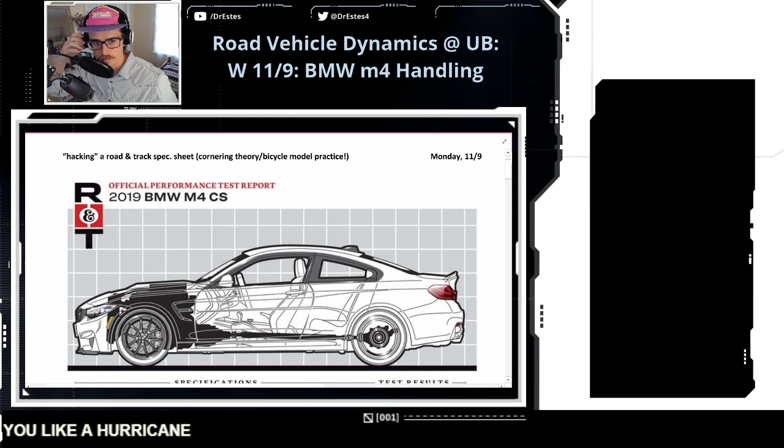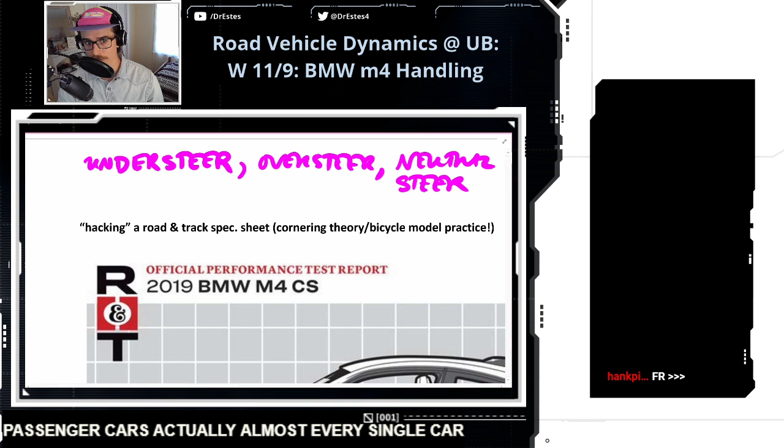Everybody, we're going to do a case study today. So we started talking about the understeer gradient and how there's different classifications of cars based on the understeer gradient. I'll just make a little note up here. A vehicle can be understeer, oversteer, or neutral steer. And passenger cars, actually almost every single car, even a high performance car, is going to be at least somewhat understeer.

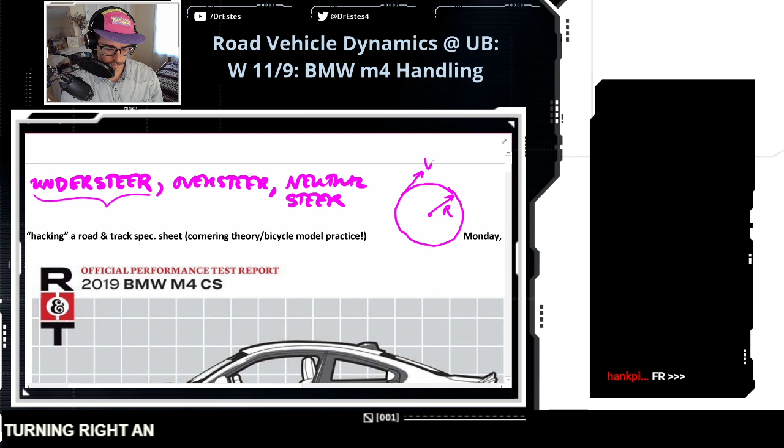We came up with a definition of the understeer gradient. If you had to say what does this mean in the simplest terms? Let's make a little picture. Let's say you're cornering a circular path, so it's got a constant radius. In vehicle dynamics, the technical name for this path is a skid pad. We use it for all sorts of handling testing for vehicles. But let's say you're turning right and your velocity is tangent to this circle. If you're in an understeer car and you keep going around this circle but slowly increase your speed, you're going to notice that you have to increase your steering angle as well. So you're going to have to keep turning harder and harder to the right to stay on this radius.

For an oversteer car, it's the opposite. As you increase your speed turning right, you're going to have to actually start decreasing your steering. And it can even get so extreme that you're counter steering eventually, which is what you see in drifting, right? Somebody might be taking a right turn, but their wheels are pointed to the left. The special thing about a neutral steer car is you can ride on this radius at any speed and your steer angle is not going to change. It's just like your steering wheel is fixed. And you can keep increasing speed and you're going to have to make minimal steering adjustments.

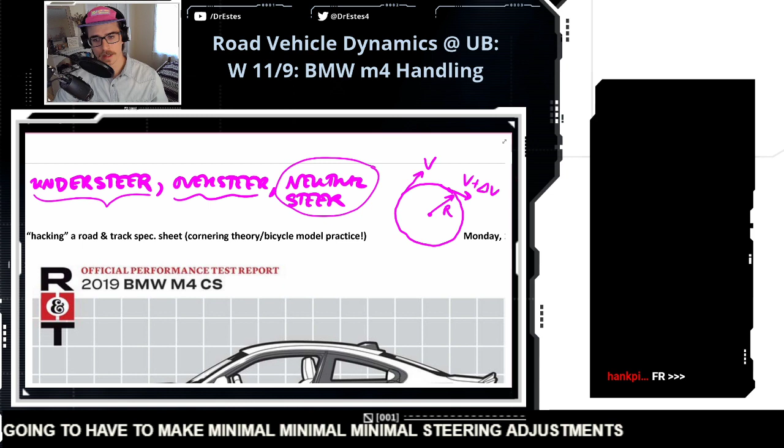So that's just a basic idea of what it means to be understeer or oversteer, but these have other implications on a vehicle's handling, and I want to unpack these this week. But so would FF be considered an understeer setup and FR be oversteer and MR neutral? I'm really embarrassed to say I don't know what that means. You're gonna have to tell me what FF, FR, and MR means.

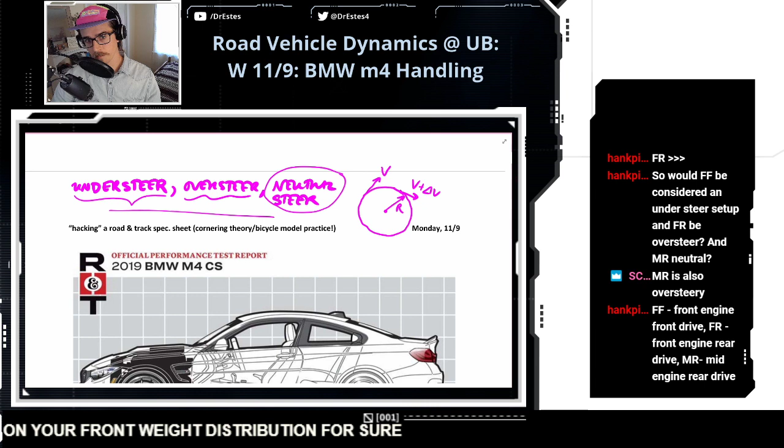MR is oversteer. FF is front engine front drive, FR is front engine rear drive, MR is mid engine rear drive. Okay, let's think about this. Actually, we can unpack this as we go, because the understeer gradient depends on your front weight distribution for sure. Actually, let's write the expression for the understeer gradient right here, if I can remember what it is.

So it's the mass of your car divided by L, which is your wheelbase, the distance between front and rear axles, times your rear cornering stiffness times the distance from the rear axle to the CG, minus your front cornering stiffness times the distance from the front axle to the CG, divided by the product of your front and rear cornering stiffness. So if you're understeer, your understeer gradient is going to be larger than 0. If you're oversteer, it's going to be less than 0. And if you're neutral steer, theoretically, it's going to be 0.

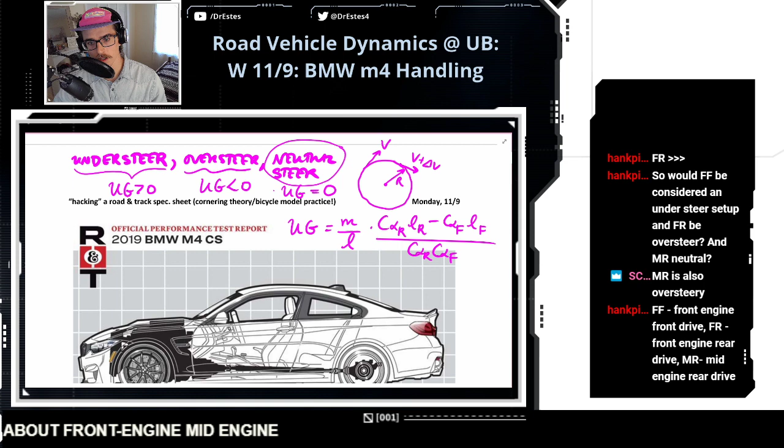So when we're talking about front engine, mid engine, rear engine, if your engine's at the front, we can just look at the M4 right here. They show a little silhouette of the engine up here. Okay, so front engine on the M4. Now, the engine's heavy, so a lot of your weight is toward the front. The distance from the CG to the front axle is LF. So if you have a front engine, this term is going to be smaller.

For an understeer car, the understeer gradient is positive. So if I make this number smaller, then this will make the car more understeer, because I'm subtracting less. Now, there's a competing effect here. It can be a little tricky, because you're also subtracting your front cornering stiffness. When you shift your weight to the front of your car, you put more normal load on the front tires, and the cornering stiffness goes up at your front tires. And that makes the car more oversteer, actually. So it's hard to say just based on weight distribution, because it depends a lot on the tires too. But I would say generally front engine front drive is more understeer. Front engine rear drive is probably more neutral. Mid-engine rear drive is neutral, maybe pushing oversteer a little bit.

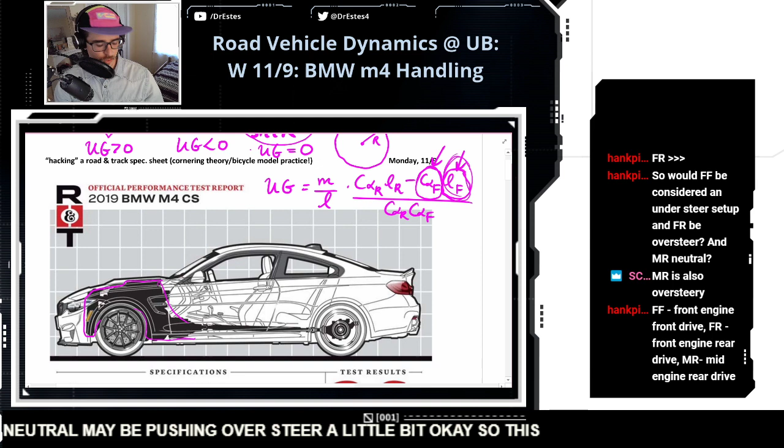Okay, so this Road and Track performance report is pretty cool, because they have a lot of information. We'll jump all over this sheet, but the thing that we're going to focus on is the result of the skid pad test. They have a 300-foot skid pad, that's talking about the diameter. And the M4, traveling in one direction or another, can hold 1.05 Gs before it starts to skid out.

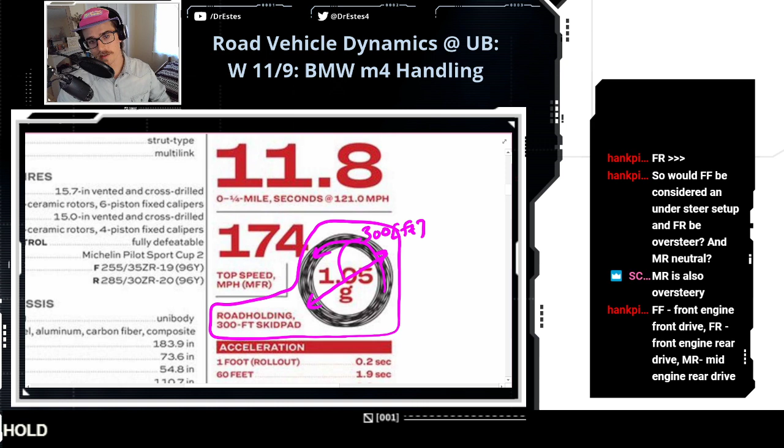If you look down here, they have a little tiny section, and they say, mild understeer. That means when they were going around this skid pad with increasing speed, going up towards the limit, they found they had to turn more and more into the turn to stay on the radius. But they say mild, and that doesn't really help us that much in terms of numbers. But we're going to make some assumptions. We'll try to dial in exactly what the understeer gradient might be.

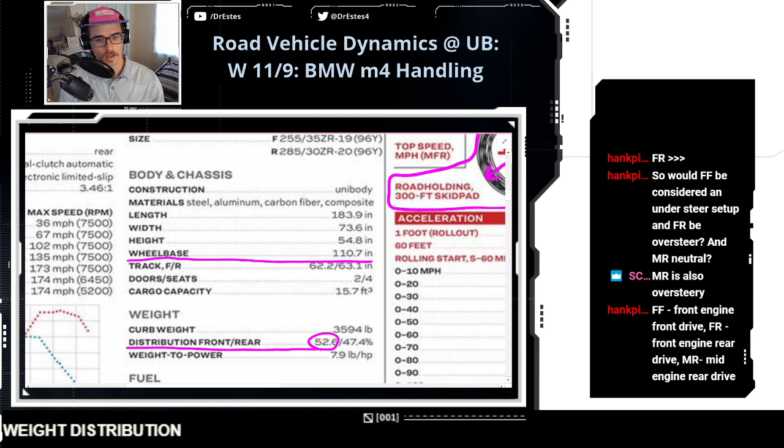Okay, let's look at a couple more things. We have the wheelbase here, so 110 inches from axle to axle. And they also tell us the front rear weight distribution. We usually just deal with front in this class. So 52.6% of the weight is on the front tires. A lot of that weight being towards the front is coming from that front engine configuration. And here's our total weight. Actually, let's jump over to MATLAB, because I want to start putting in some of these vehicle specifications.

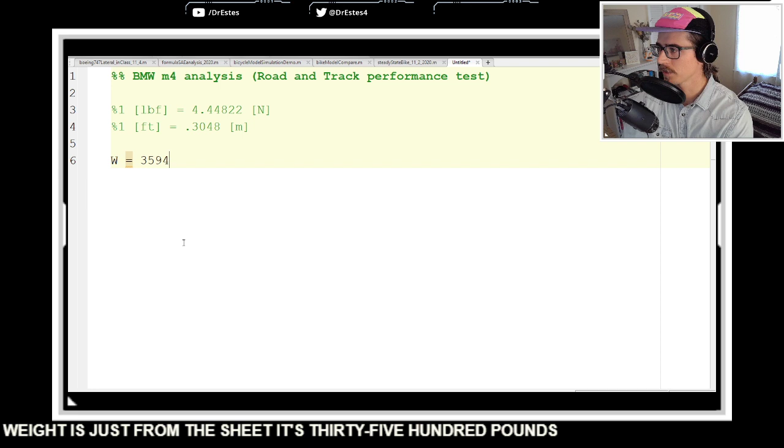Making a little MATLAB file for the M4. Okay, let's start with just some basic bookkeeping here. The weight, just from the sheet, is 3,500 pounds, almost 3,600. And I want to do everything in metric today, so we're going to convert this to newtons. I put a little conversion up here. If you multiply that by 4.44, that's going to be in newtons. Let's get the mass. You have to divide by gravitational acceleration. Let's just define g in meters per second squared. This is the mass in kilograms.

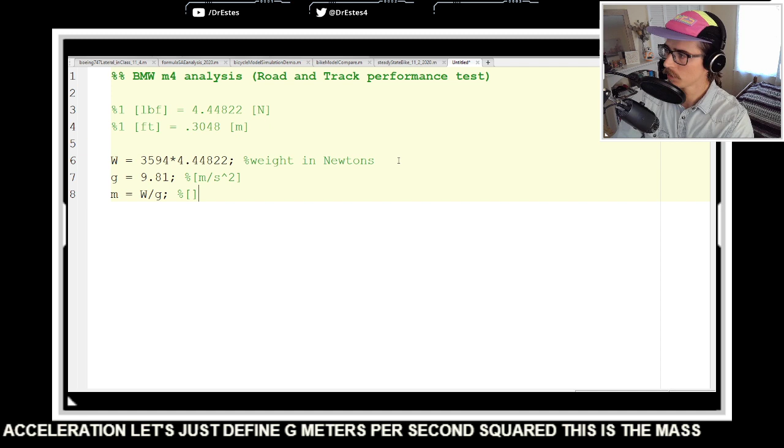Now, the wheelbase, the distance from axle to axle. Where did it go? 110 inches, right? Yeah, 110.7 inches. Let's convert that to feet, so I'm going to divide by 12. And then I want to get this in meters, so I have a little conversion at the top. If you multiply the distance in feet by 0.3048, that'll put it in meters. So we got the wheelbase in meters.

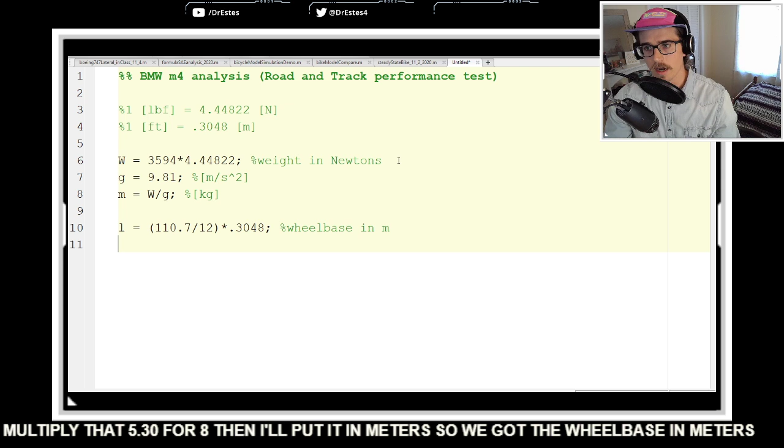Now, the front weight percentage, 52.6%. Is this like the homework, says Phil? Probably has some similarities. Okay. 0.526.

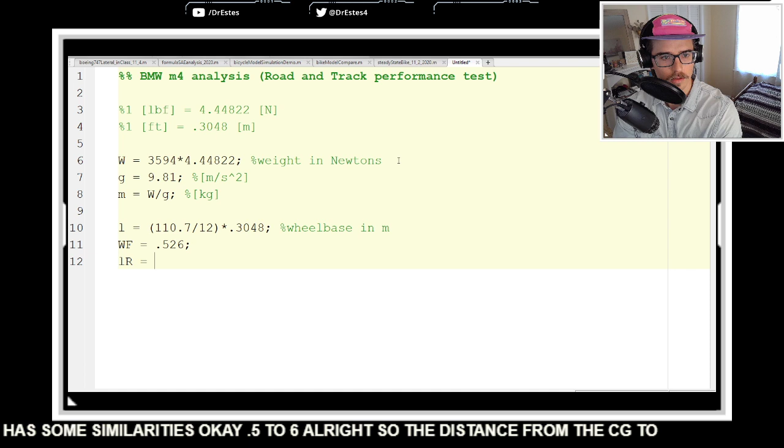All right. So the distance from the CG to the rear axle, LR, is going to be this wheelbase times that front weight ratio. And then the distance from the CG to the front axle, LF, is just going to be the wheelbase minus LR. Okay, we got this. Maybe we'll run this. M4 specs 11.9.

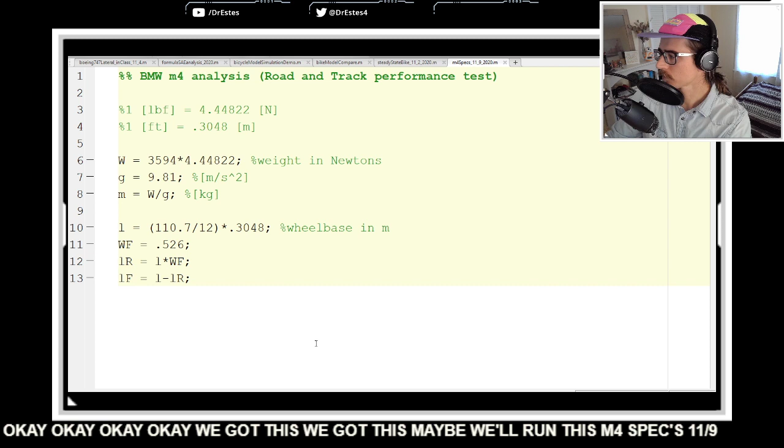Mass, that's in kilograms. LF, LR. Okay, good. Let's go back to our spec sheet.

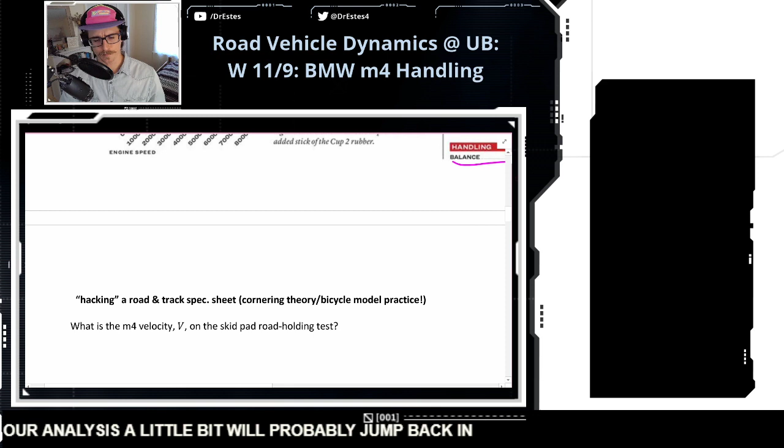Okay, so I have some questions that I want to answer to guide our analysis a little bit. And we'll probably jump back and forth to the sheet. So the first thing I want to answer is what was the velocity of the M4 on the skid pad road holding test when it started to skid out.

So the way we're going to break this down, first we know the lateral acceleration, the steady state lateral acceleration we reached was 1.05 G's before the tires started to give out. So if we get that in meters per second squared, there's 9.81 meters per second squared per G. So this is 10.3 meters per second squared.

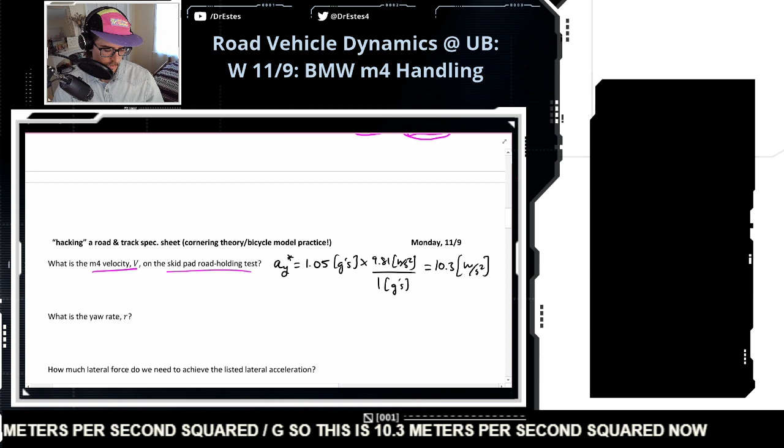Now we have a basic formula that relates the lateral acceleration to the velocity, which is this: v squared divided by the radius of the circle we're going around. So we know the radius. The skid pad is 300 feet in diameter, so it's 150 feet radius. And we know this lateral acceleration, so v is going to be the square root of our radius times this steady state lateral acceleration.

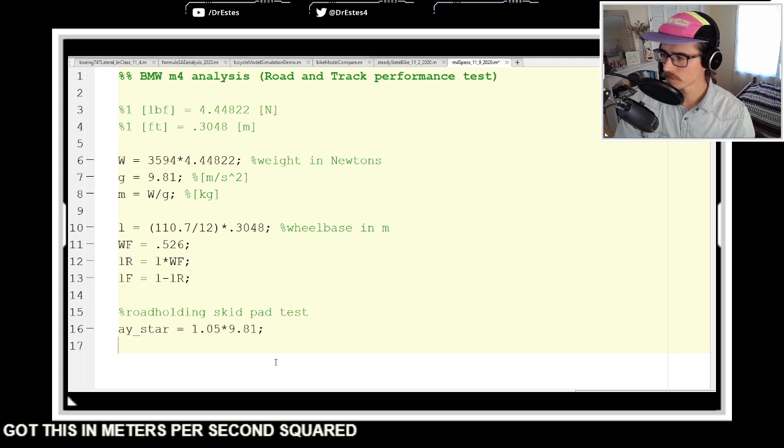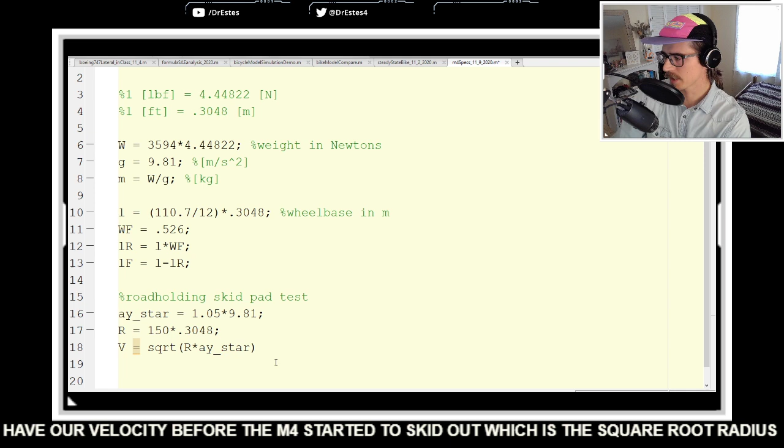So I want to pop back over to MATLAB and run these numbers. Okay, so we have the road holding skid pad test, and let's say AY star is 1.05 G's times 9.81, so we get this in meters per second squared. And then the radius of the skid pad is 150 feet, but I want to get this in meters, so I have to multiply this by 0.3. Now we have our velocity before the M4 started to skid out, which is the square root of the radius times that steady state lateral acceleration. Here we go. Let's run this again.

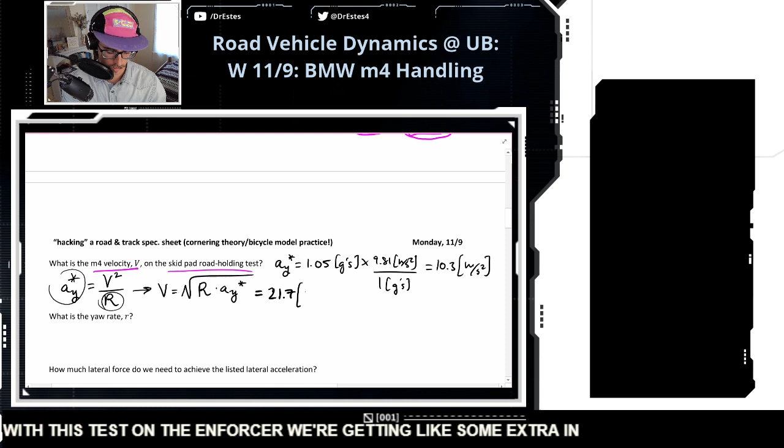21.7 meters per second. And if we convert that to miles per hour, I think it's times 2.2, roughly. So it's around 47, 48 miles per hour when it can't hold on this radius anymore. Okay, let's go back here. We're slowly dissecting what must have happened with this test on the M4. So we're getting some extra information, which I think is fun. That's why I called it hacking their spec sheet, getting more information than they actually give us.

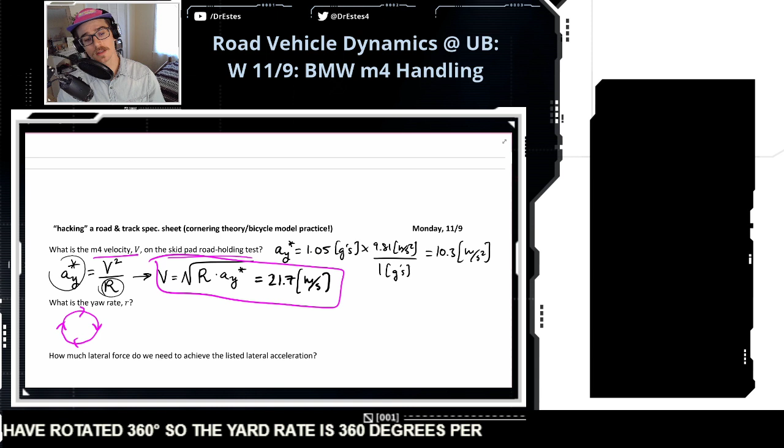Okay. Great. Now, the yaw rate is the rotation of the CG relative to the fixed axis. So you can think of it this way. When the car completes one revolution, one circuit of this skid pad, it will have rotated 360 degrees. So the yaw rate is 360 degrees per its lap time. Right? Okay.

So let's break this down kind of slow. So let's see, the lap time. Okay, so it does 2 pi radians of rotation over the lap time, which is, wait, how fast does it get around this? 2 pi r is the circumference divided by the velocity, right? So this becomes v over r. 21.7 meters per second divided by the radius. What was that in meters? 45.72 meters.

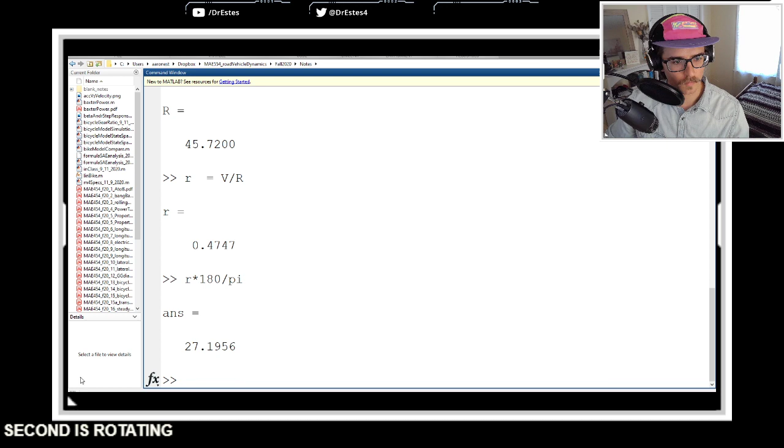Let's crunch the numbers. Okay, the yaw rate, r, is V divided by R, and this will be in radians per second. So 0.47 radians per second. And then if I take this and multiply it by 180 divided by pi, that's how many degrees per second it's rotating. So let's record these things. 0.47 radians per second, or 27.2 degrees per second. That's how quickly it was rotating on the skid pad before it gave out. Okay.

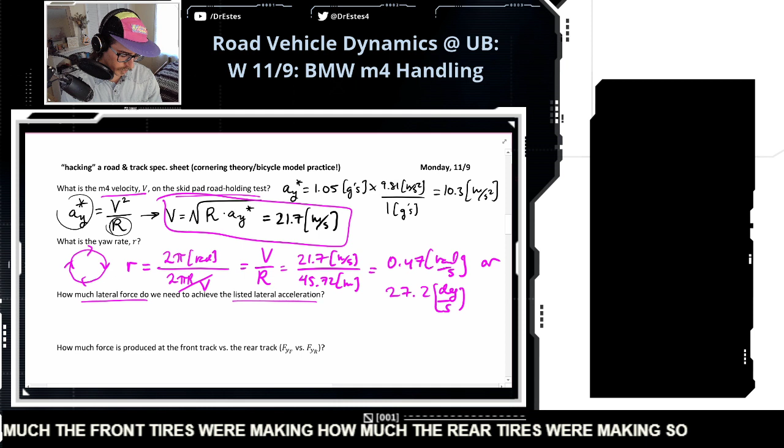Now let's keep digging deeper. How much lateral force do we need to achieve the listed lateral acceleration? And then we're going to break this down to how much the front tires were making, how much the rear tires were making. So, all right, we have this basic force balance. The mass of the car times the lateral acceleration, so the acceleration that's holding it into the skid pad. The forces are coming from the lateral tire force at the front and the lateral tire force at the rear. This is assuming a small steer angle as well, because there would be a cosine delta term in front of here, but I'm assuming that's a relatively small steer angle. Actually, I think I plan on calculating what the steer angle exactly was, so we'll see how valid it is that it's small.

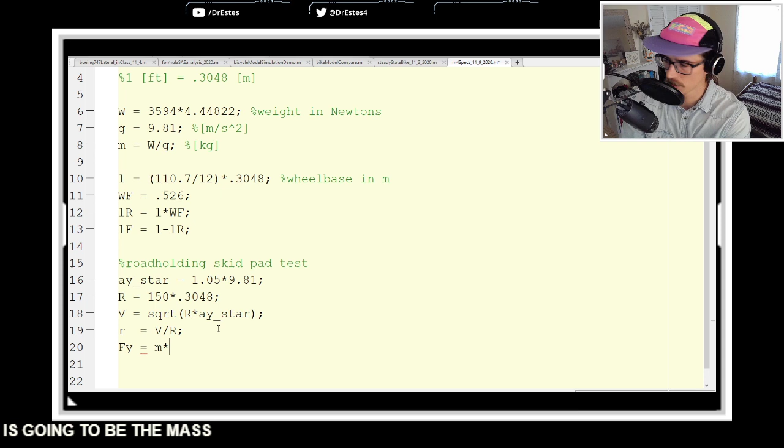Okay, so the combination of forces, we can just take the mass of the car times that lateral acceleration, and we're going to get that right here. So we'll say Fy is going to be the mass times that lateral acceleration. Let's get that. So 16,786 newtons of force.

Before it starts to slip. Now, what I want to do next: how much of this was made by the front tires and how much of this was made by the rear tires?

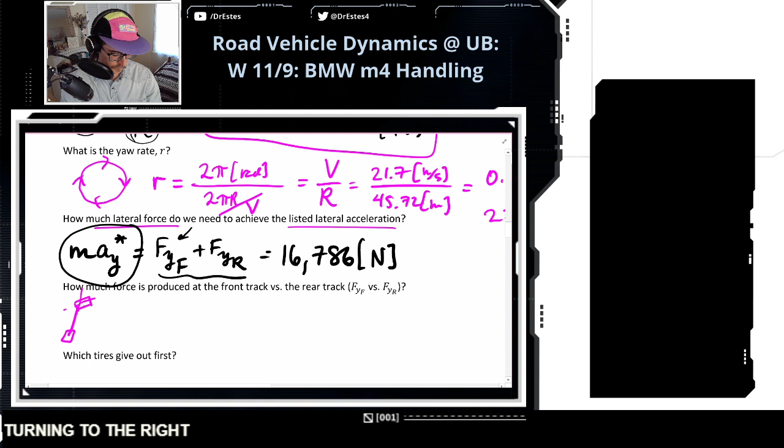Now, the key here is that, let's draw a little schematic of the bicycle model. I'm turning to the right. And I have my CG somewhere over here. I have the rear lateral force. I have the front lateral force. And these both create a moment about the CG.

But this moment needs to balance. The rear's creating a moment this way, the front's creating a moment that way. If they don't balance, the car is spinning out. But we know that the car was moving at steady state. It wasn't skidding out at this point. The moments were balanced. So we're going to have the condition that the moment from the front, which is FYF times LF, is equal to FYR times LR.

So if we solve for FYF from this expression, I get a ratio that describes the front to rear lateral force. So what I can do now is go back up to this expression and substitute in for FYF. So I'll have LR over LF plus 1, times FYR, is equal to 16,786 newtons. We'll get that.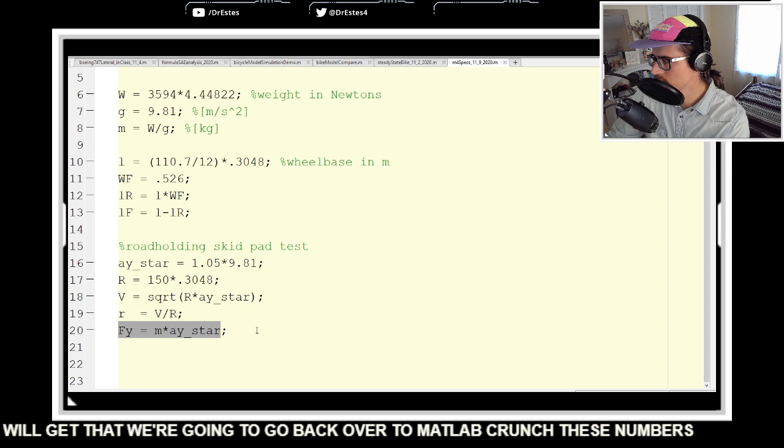We're going to go back over to MATLAB and crunch these numbers. So we'll get the rear lateral force first. It's going to be that total lateral force divided by LR over LF, and we got those lengths up above, plus 1. And then because FYF and FYR have to add up to the total, we can make this subtraction.

Hey, UB Math Prof. Welcome. Good to see you. Is that Kirby or something?

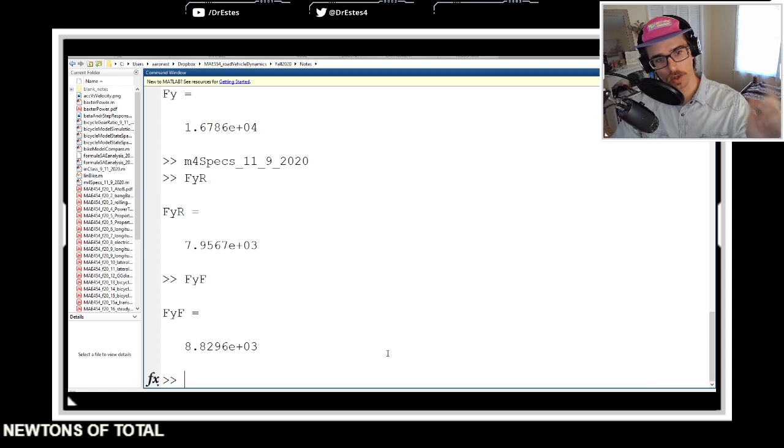Okay. Let's run this. FYR, FYF. Okay, so remember we had like 16,000 newtons of total lateral force to hold us into this corner, and the majority of it is being produced at the front.

Okay, FYR is 7,957 newtons. FYF is 8,830 newtons. All right. Now, okay, so more is produced at the front.

Now, this is more a conceptual question. The only way you know this is from the definition of understeer, oversteer, really. So which tires are going to be the first ones to start sliding out? Well, more often than not, for an understeer car, which the people who drove this car said it was mild understeer, the front tires go first.

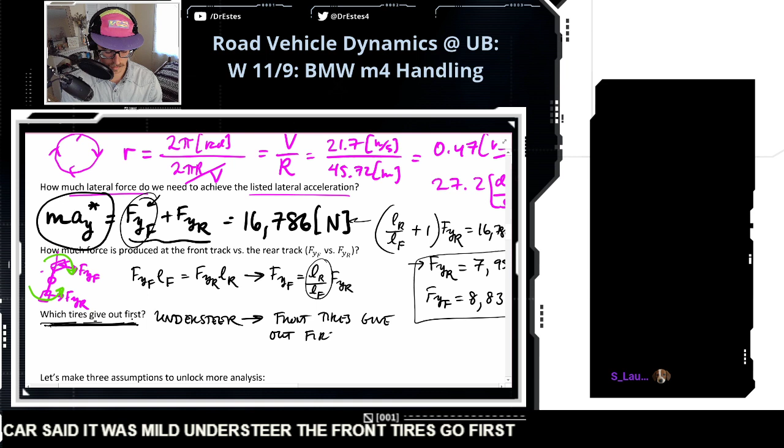And the reason is that for an understeer car, the front tire slip angles are going to be larger in magnitude than the rear tire slip angles. And assuming that the front and rear tires are similar, there's a critical slip angle, which we know about, beyond which we start to lose lateral force.

So if you have lateral force versus slip angle, it looks like this. As slip angles increase in either direction, eventually you reach a point where the lateral force drops off. So with understeer, the front slip angle is larger. It's going to reach that limit before the rear tires. So we're assuming that the front tires were the ones on the skid pad test that gave out. That's extra information that we're gleaning from this using our road vehicle dynamics knowledge.

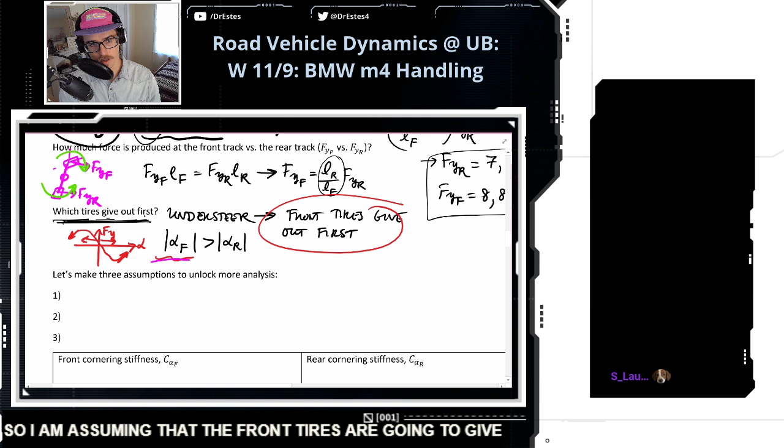Okay. I want to make some assumptions here, and this is related to understeer, oversteer. So I'm assuming that the front tires are going to give out first, right? Now, I'm going to assume that the front tires give out when alpha F is 6 degrees. The front slip angles are 6 degrees. And that's actually a decent assumption. Beyond 6 degrees of slip, you're probably going to start losing lateral force.

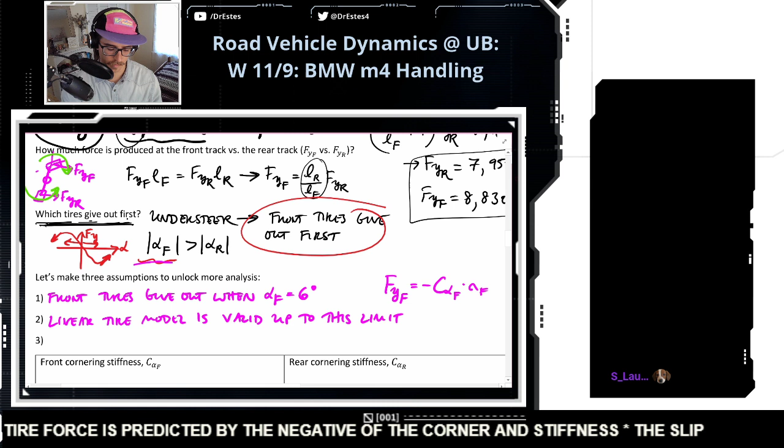This next assumption that I'm going to make is not as good of an assumption, but we're going to go with it. I'm going to say that the linear tire model is valid up to this limit. So what I mean is the linear tire model says the front lateral tire force is predicted by the negative of the cornering stiffness times the slip angle at the front. So it's just totally linear. More slip equals more force, always in the same proportion.

But in real life, the lateral force is only linear, maybe up through plus or minus 3 degrees of slip. And then it starts to go into this transitional region where there's less slope, and then eventually it reverses. So if you just use the linear tire model, if you track this slope, it's going to create a gap between what the actual tire does and what you're supposing it does. So to summarize, the linear tire model over predicts tire force beyond like 3 degrees of slip or something like that. So if I'm saying that the linear tire model is valid up to 6, it's just not as clean. Okay, but we're going to make that assumption. Now, oh, I just dropped my pen.

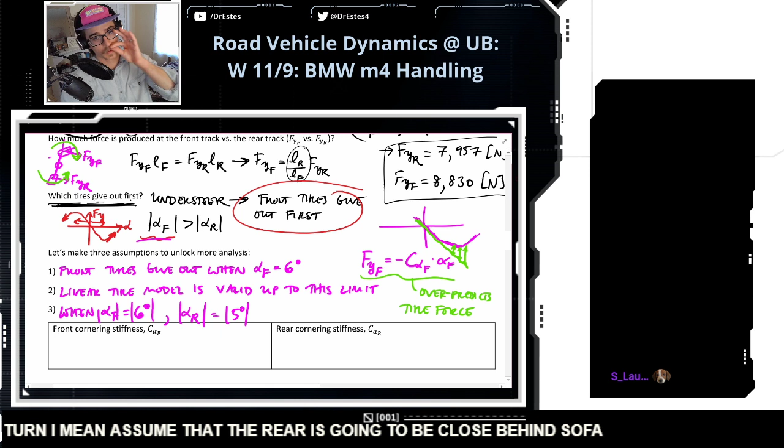Third assumption. When our front tires get to the limit, so once they get to 6 degrees, let's do magnitude here. So it could be good for a left or a right turn. I'm going to assume that the rear is going to be close behind, so 5 degrees. But this still means that the front tires would give out first, because once the front reaches 6, the rear is only at 5, and it has a little bit of distance to go before it reaches its own critical slip angle. And this is what I'm interpreting mild understeer as. They say the car has mild understeer. Well, I'll say it means this, that the rear tires are almost at the point of giving out when the front tires give out.

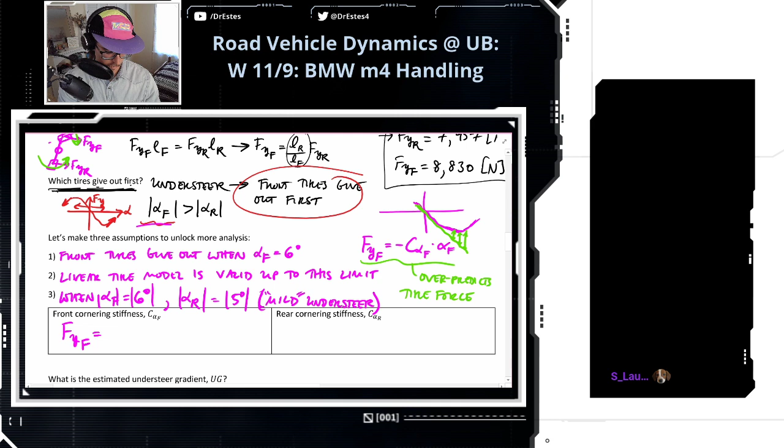Okay, now what these assumptions allow us to do is predict the cornering stiffnesses of the front and rear tires, which is very hard information to find. It's often proprietary, and it's very expensive to get that data. So we're going to get in trouble for calculating this right now.

Okay, so I know this isn't a good estimate of that tire force. But I'm going to say this is approximately C alpha F times alpha F at the critical slip angle, which we're saying is like 6 degrees. So C alpha F, let's say minus 6 degrees. And I have to express this in radians, because I want my cornering stiffness in newtons per radian. I'll just keep everything in SI units.

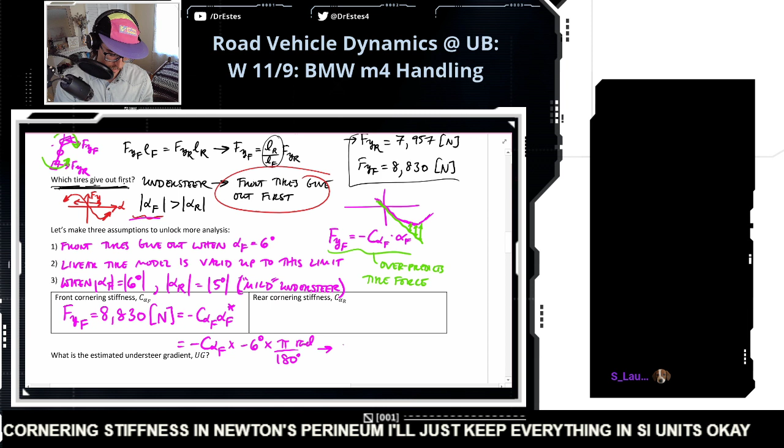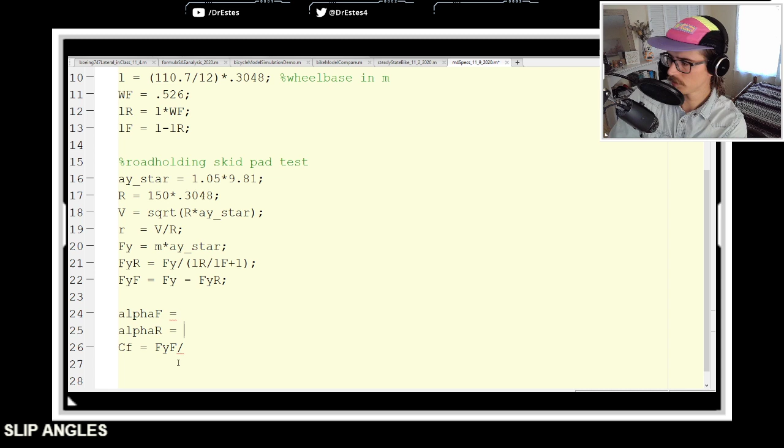We have to jump over to MATLAB again to get this number. We're predicting the cornering stiffness. Okay, so I'll say CF is going to be FYF divided by... Actually, let's define our front and rear slip angles. I said this was 6 degrees, but I'm converting that to radians. I'm saying the rear is 5 degrees. Let's also get that in radians. And then for the rear, it's going to be the same kind of thing, alpha R. All right, let's see what this says.

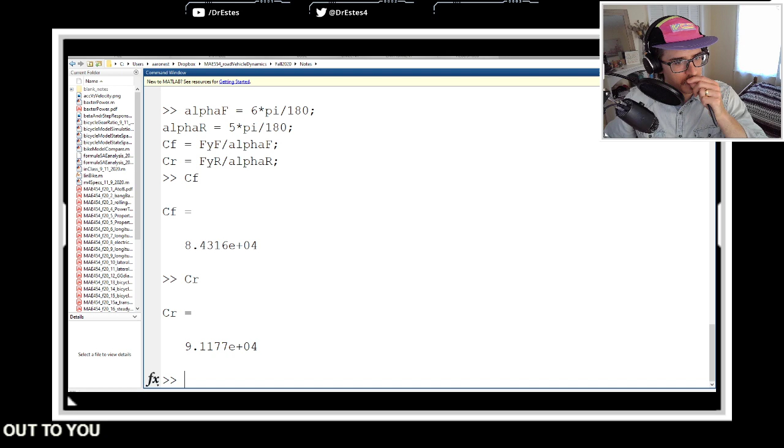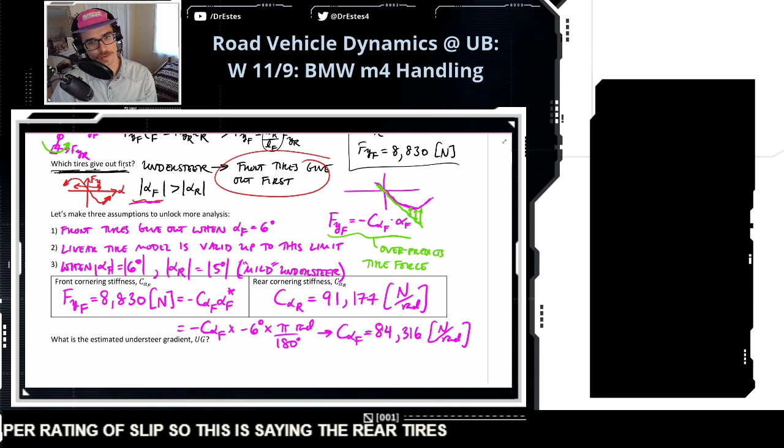Okay. Ooh, this is going to be interesting because I want to point something out to you. All right, let's write these down. So the front cornering stiffness is 84,316 newtons per radian of slip. And C, the rear, is actually more. It's 91,177 newtons per radian of slip. So this is saying the rear tires for the M4 are a little more stiff. They're a little more grippy in a way. Like if you deflect them a little bit, it's going to provide more force than the front.

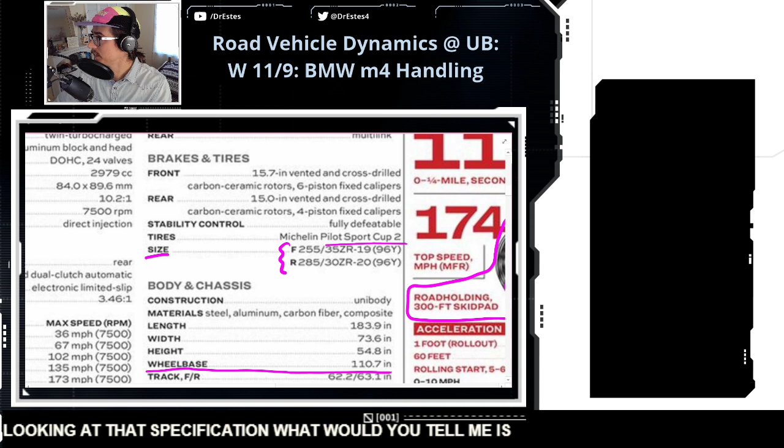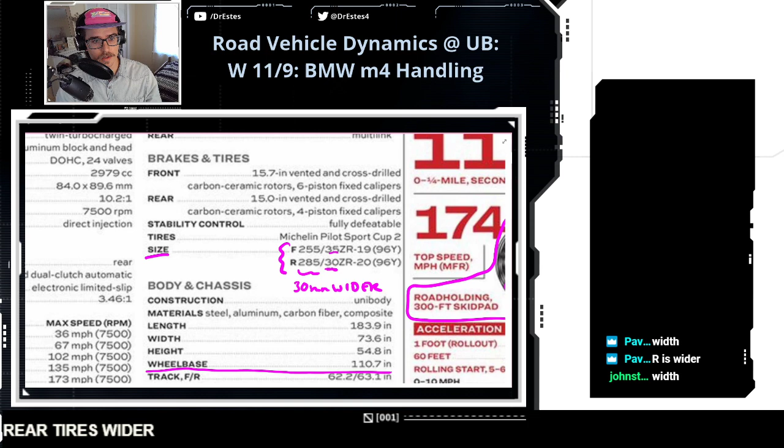Oh yeah, I wanted to show you this. Because they tell us a little bit about the tires. They just tell us about the dimensions here. So we got the tires, Michelin Pilot Sport Cup 2, and then we have front and rear. And looking at that specification, what would you tell me is the main difference between these tires in terms of how they look? Because we now know how to read these things. Yes, the width. The rear tire, 30 millimeters wider. And based on this number here, the sidewall is a little bit shorter as well. So the rear tire's wider, thinner sidewall. I mean, maybe we can see in the picture here. You can't really tell from this. It's pretty close.

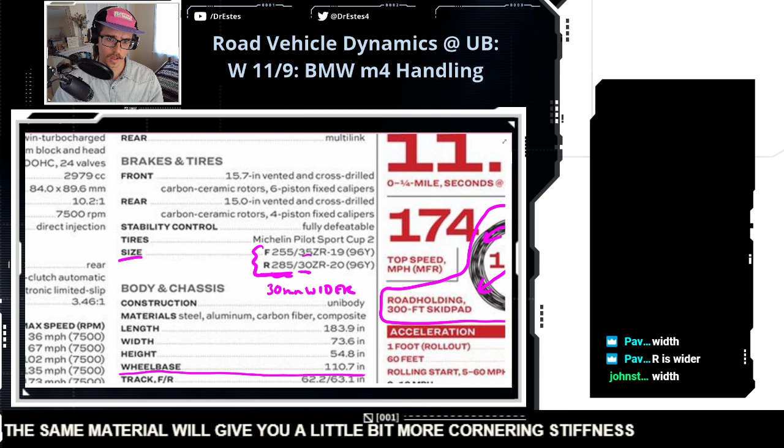But think about, we're just predicting that the cornering stiffness of the rear is more, meaning it creates more lateral force per deformation. I think it makes sense. Like when they were designing this car, they were like, okay, if I want a little bit of understeer given our weight distribution, maybe we have to pump up the width of the rear tire a little bit to increase that cornering stiffness. I do generally think a wider tire, given the same material, will give you a little bit more cornering stiffness. So that is interesting to see that we're predicting a little bit more cornering stiffness at the rear. And then when we look at the tire dimensions, it's kind of confirming what we're guessing at least. So I thought that was pretty cool.

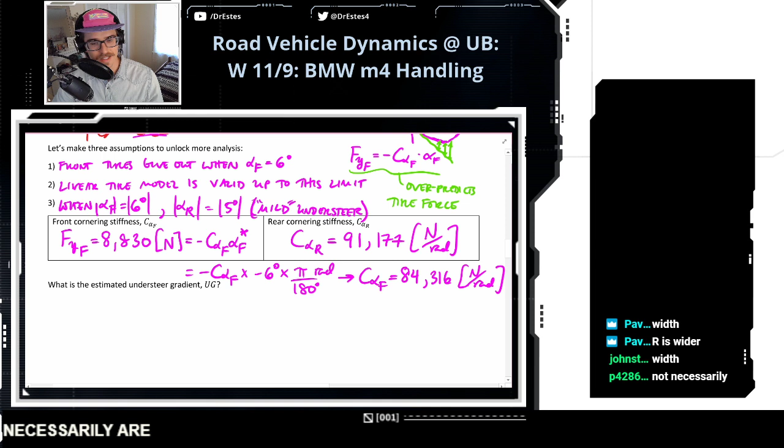Let's see. What did their test notes say? Okay, nothing. Okay, what did I want to do next? Okay, so we have a guess for the cornering stiffness. Phil says not necessarily. All right, what is the estimated understeer gradient given these? The second number is a percentage. What second number? Okay.

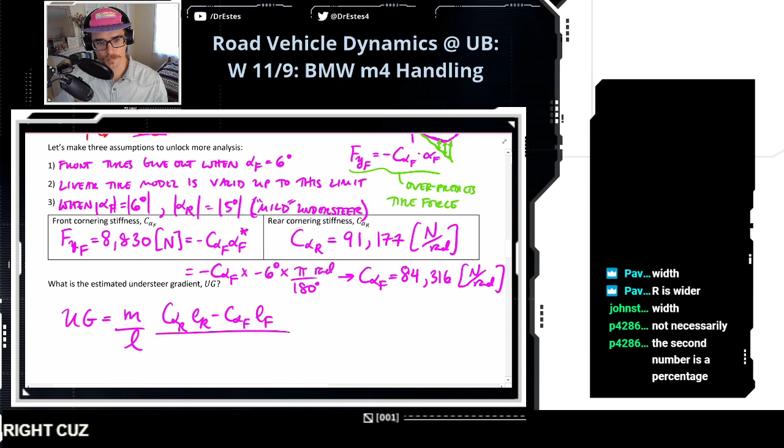Oh, the sidewall is thinner. No, you're right. Well, that's what I was saying, that the rear sidewall is thinner. But if I take... let's make sure though. Oh, you calculated it? Oh, yeah, so it is thinner, yeah. But I see what you're saying.

Just because it's 30 here, that doesn't mean it's a shorter sidewall, because this means 30% of the width. So even though, because this is wider, you have to be careful. 30% of 285, is that smaller than 35% of 255? I think it still is thinner like you calculated, but it's not necessarily.

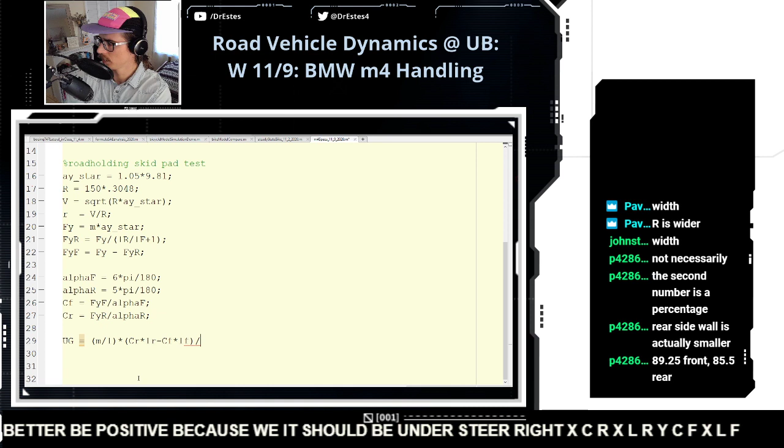Right, I wanted to do the understeer gradient based on these cornering stiffnesses, which better be positive because it should be understeer, right? Times CR times LR minus CF times LF, divided by CR times CF. So this will be the understeer gradient in radians per meter per second squared. Let's do it.

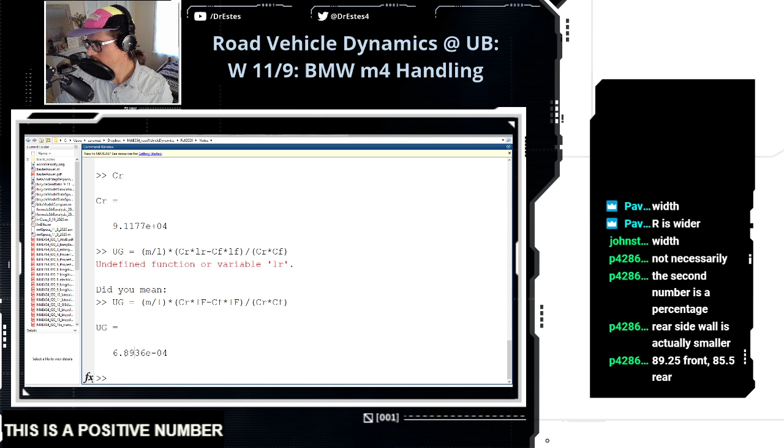Oh, I got an error. I think it's because I capitalized these, that R and that F. Ooh, so it's a positive number. A small positive number. C alpha R, C alpha F. Shouldn't that be LR? Oh! Let's go back in here. Oh boy.

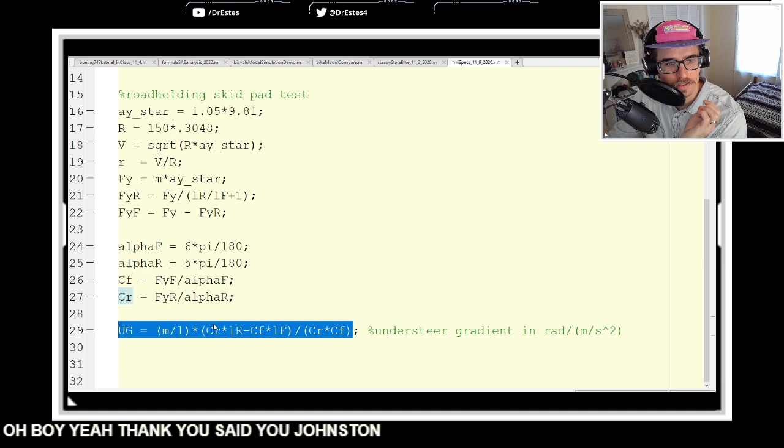Thank you, Johnston. All right, let's do this. So now this is bigger. Okay, 0.0017. Slightly positive. Positive understeer gradient, in radians per meter per second squared. Okay, so understeer check: it's greater than 0. Let's see here. There was something else.

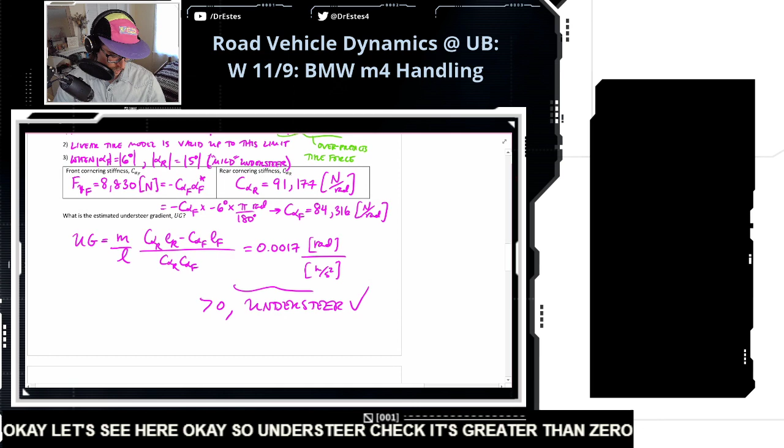Okay, let's get these last two items and then we'll call it a day because I know we're running low on time. I also want to predict what the side slip angle of the vehicle was during the skid pad test. Was it nose in to the skid pad? Was it nose out? And what actually was the steer angle?

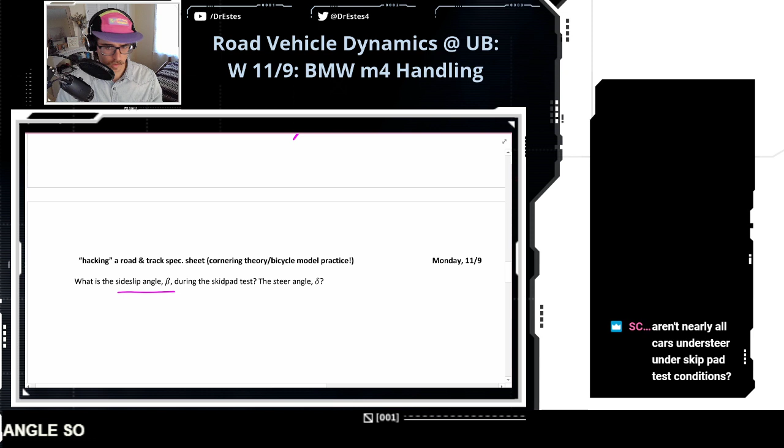Aren't nearly all cars understeer under skid pad test conditions? Yes, I would say so. Unless you really slam the gas, but under steady state conditions, yes. Any production car is going to be understeer. Even a supercar, they're going to make it understeer because it's stable. But when they do these skid pad tests and mention understeer, they might find it's very understeer compared to others. So I think saying mild understeer is like a compliment to the car.

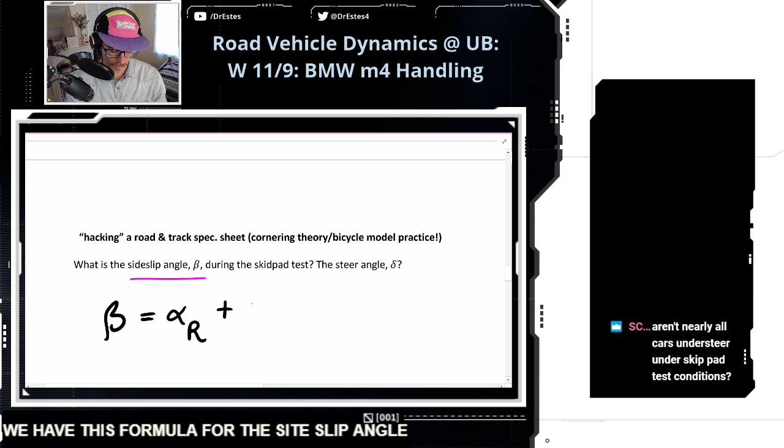We have this formula for the side slip angle, and we derived this formula when we talked about the geometry of the bicycle model during cornering. Okay, let's get this. So we're assuming that if I'm making a right turn, I should have negative slip angles. So let's say this is minus 5 degrees by the time the front tires had given out. But let's convert this to radians. We have to be careful with that. For this formula, everything should be in radians.

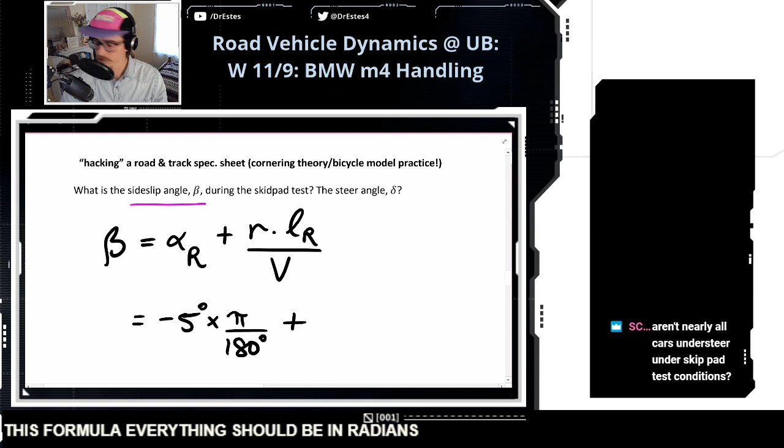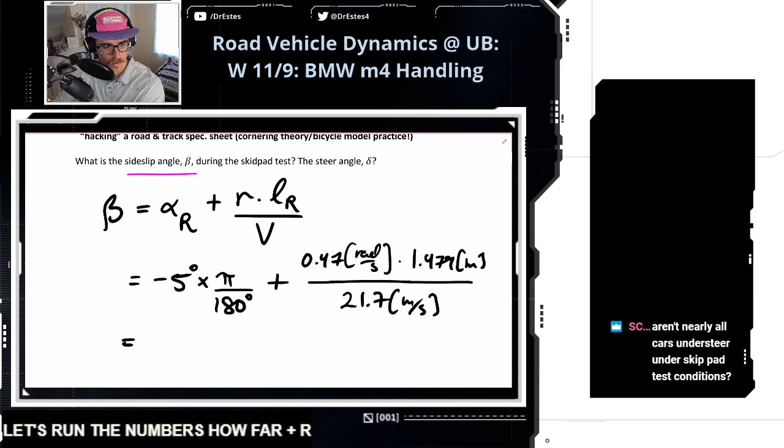I need my yaw rate R. I have to jump around and get these. R, LR. So this is 0.47 radians per second. LR was 1.479 meters. And the velocity in meters per second was 21.7. Let's run the numbers. Alpha R plus R times LR divided by V. And I should make these negative up here. This should be negative. 0.1196 radians. What is this in degrees?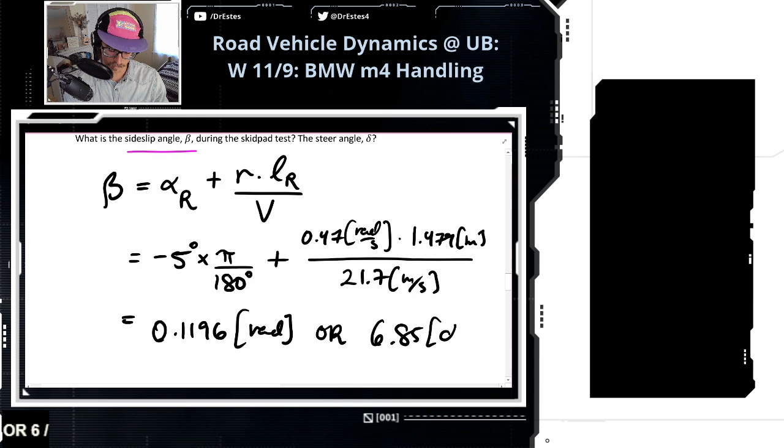Times 180 divided by pi. 6.8 degrees of side slip, and it's positive. So is that nose in or nose out for a right-hand turn? Let's think this through. Or 6.85 degrees. And if I'm making a right turn, let's say my nose is pointed out. That's like the body frame. And here's my velocity vector. The side slip is measured.

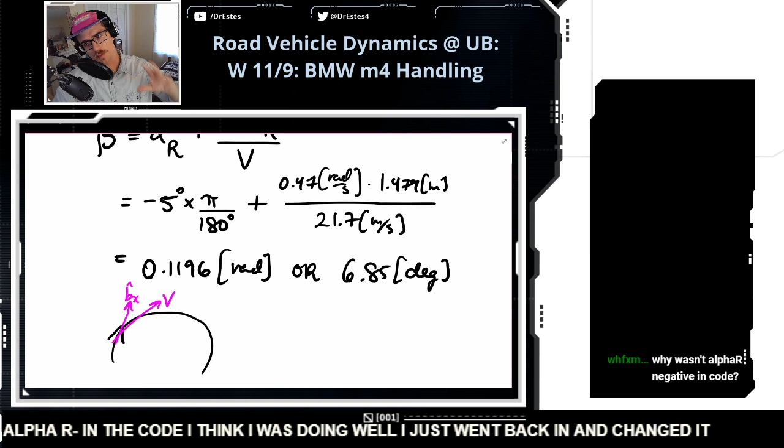Why wasn't alpha R negative in the code? I think I was switching around signs in my head, but I was switching everything so that the final sign came out consistent. But it should have been negative in my code. This would be a negative side slip angle here. No, this is positive. This is positive, because we're going clockwise. Okay.

So the vehicle was nose out of the corner by the time we were skidding out.

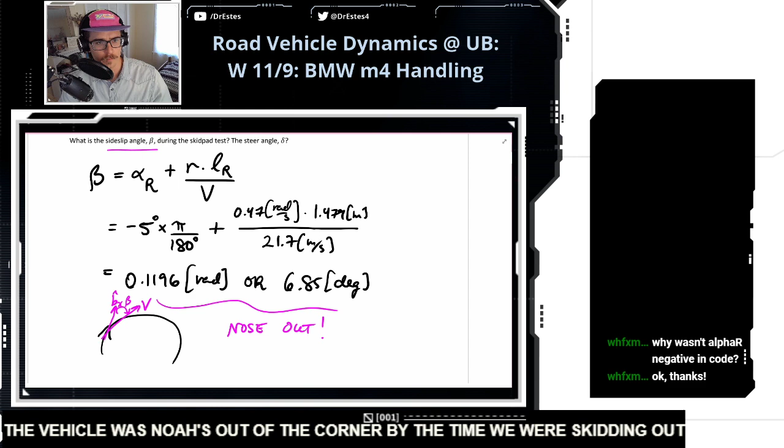And why don't we do this steer angle as well? Because that's pretty quick. We have another formula for the steer angle based on the geometry here, over V. So we can take this side slip angle from up there, positive 0.1196 radians. Alpha F is going to be minus 6 degrees. We'll convert it to radians. We'll do this yaw rate. Let's just do it all in MATLAB to speed it up, though.

Okay, our steer angle, delta, is going to be beta, our side slip, plus r, our yaw rate, times LF divided by my velocity, and then minus alpha F. Yeah, and I fixed these angles up here. I think this works. So this is just negative for right turn.

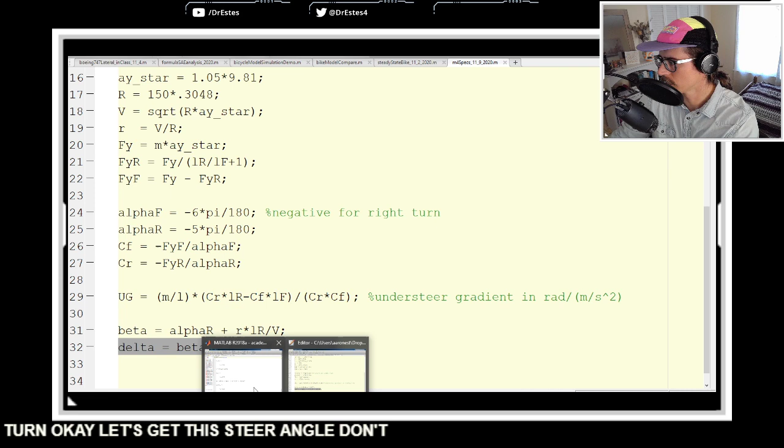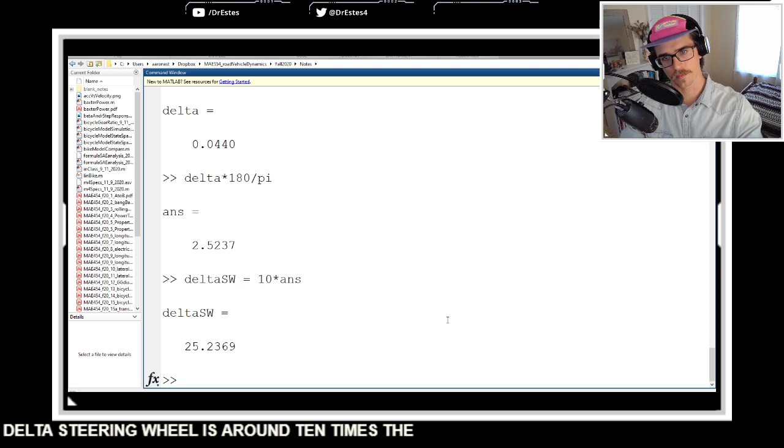Okay, let's get this steer angle, delta. Not very much at all. Times 180 divided by pi, 2.52 degrees of steer at the front tires. This doesn't mean how much the steering wheel is actually steered. There's a little bit of a gear ratio between those. So probably delta steering wheel is around 10 times that. So maybe it'll actually feel like 25 degrees at your hands, but the tire itself at the ground is turned 2.52 degrees to the right. So we'll just fill this one in: 0.044 radians, or 2.52 degrees.

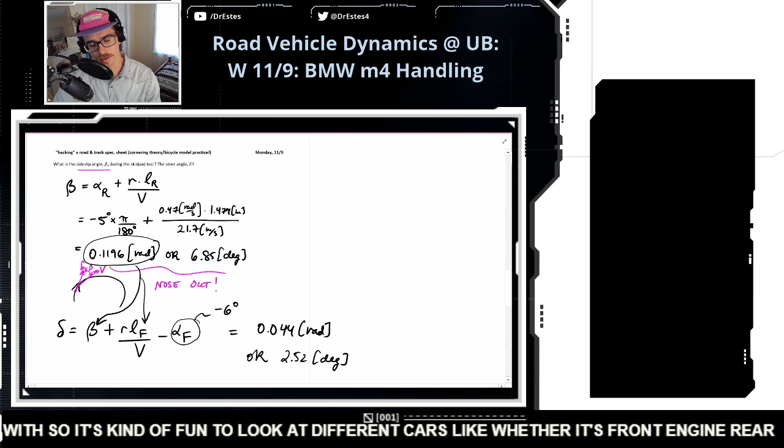Okay, so that's it for today. I wanted to look at this performance sheet, see if we could get a little bit of extra information out of it by making a couple assumptions. And this is kind of fun because you can do this with any car that they've run this test for. They have libraries of vehicles that they've done these tests with, so it's fun to look at different cars, whether it's front engine, rear engine, different kinds of stuff. There we go. We've dissected this sheet. And this week we'll keep chugging away at this stuff. And then next week,

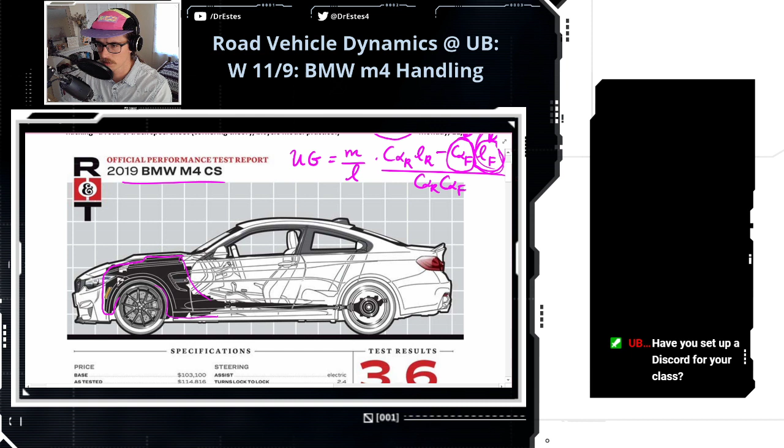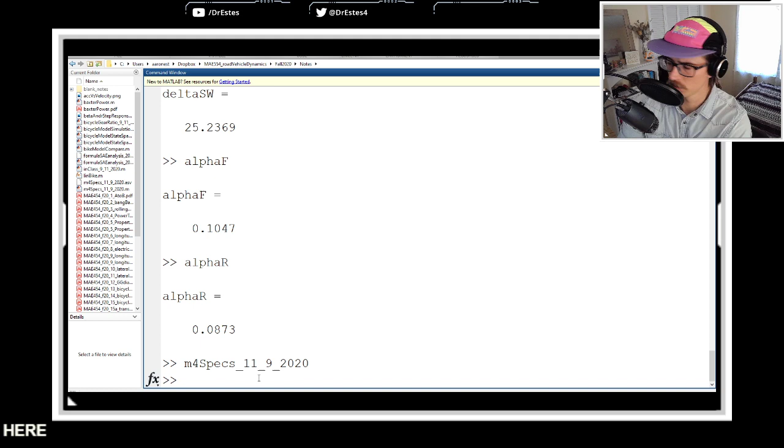what is the value of alpha F and alpha R in the workspace? Let me give you that. But I think next week we're going to start getting into load transfer and, oh wait, did I not change these things? Uh-oh. Hold on a second here. We're going to get some different answers for beta and delta. Oh, you're right, Jimolino. Thank you. Beta is now negative. Oh, good grief. Okay, hold on a second here. What is beta in degrees? Let's also get that steer angle. 4.5. That makes a big difference. I'm really glad you pointed that out.

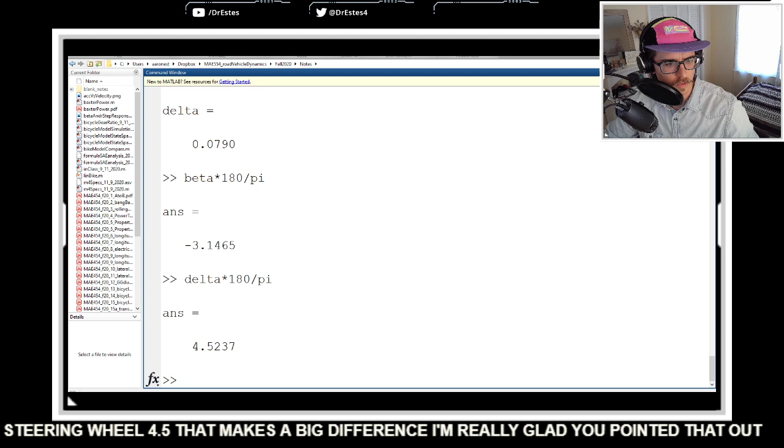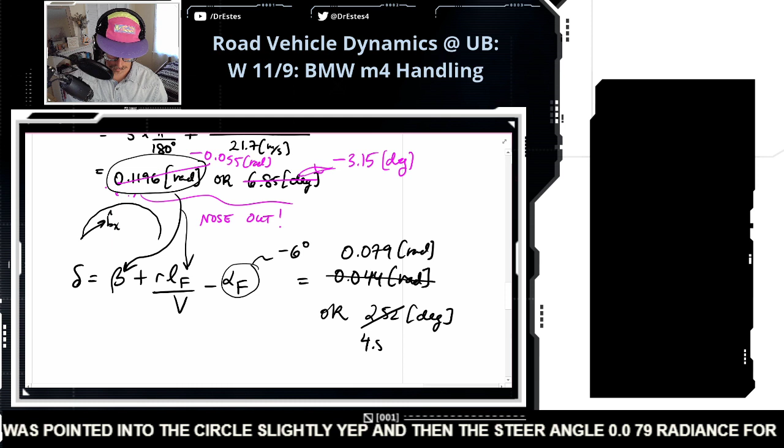So this should be... And that means the car's nose in. Minus 0.055 radians, or minus 3.15 degrees. Yeah, that means the M4 was turning right on the skid pad, and its nose was pointed into the circle slightly. Yep. And then the steer angle, 0.079 radians, 4.52 degrees. Some more steering as well.

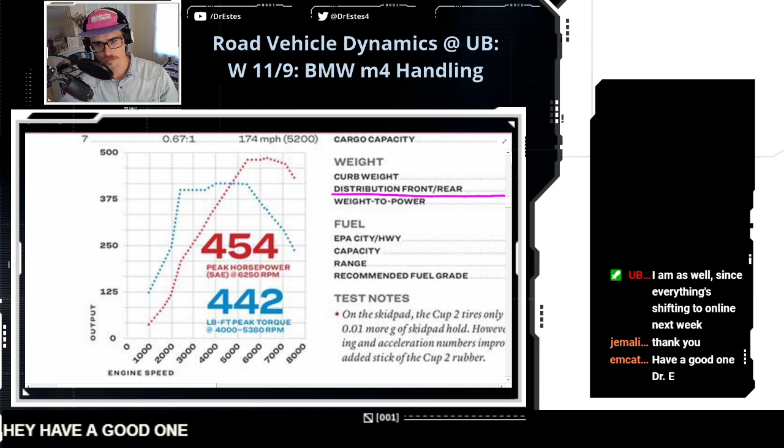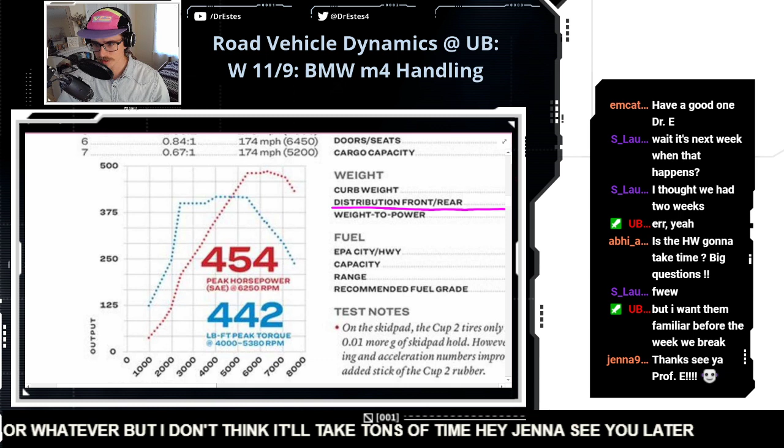Thank you very much. UB Math Prof asks, have you set up a Discord for your class? Yep, we did set up a Discord. Are you thinking about doing one for your class? Thank you guys a lot. Oh, right. Everything's going online next week. Wait, isn't it the week after next? Hey, have a good one, emcat. It's after Thanksgiving, right? I thought we still had a little time. I guess it won't affect us at all. Abhinav says, is the homework gonna take time? Big questions. I think the questions look kind of big, but I don't think it'll take tons of time. Hey, Jenna. See you later. Good to see you as always. Oh, I see. You want them to be familiar before the week we break.